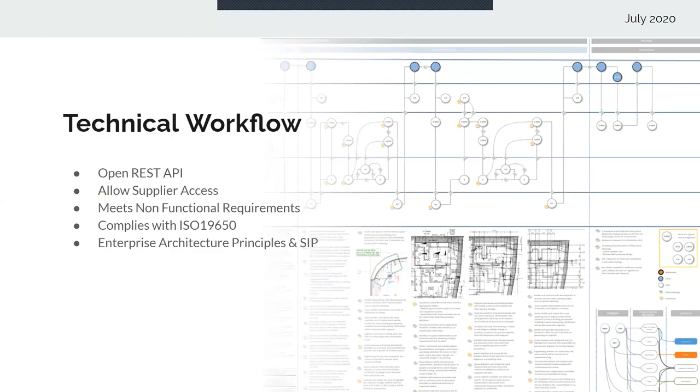The other one is, like I said, consulting work that we do, and this one was for the company YTL. Basically it was a dual track electric train system from Johor all the way to Gemas. The track itself, as you see, is almost 200 kilometers with 11 stations. So that's our involvement in that project.

What we've done specifically is help generate some digital assets. So they manage a lot of the production of the culverts, and I'm sure a lot of you have seen models dealt with in 3D, and there's always this perception that in the model it looks small. So this is one of the culverts, but in reality, that's how big some of the culvert sizes are. And I'm sure in Vietnam, being a tropical state, or in the tropical location, you get the monsoon seasons where there's a lot of rain, a lot of weather and so forth.

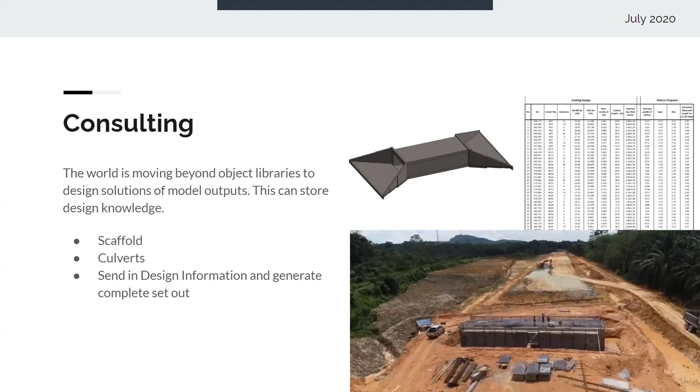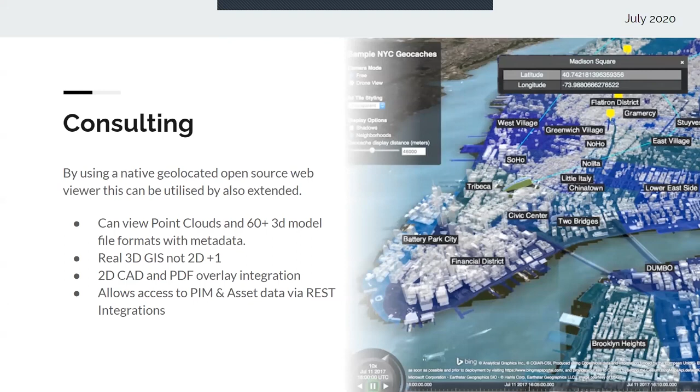So that's some of the work we've done. Further to this is, how do we explore data from a city's perspective? We've seen a lot of interest lately on how state and local authorities within Australia are going to better manage assets around the city. We've been able to work in these spaces, helping with GIS information, civil CAD information, as well as BIM deliverables. There's a variety of information that gets incumbent into a department, similar to how Vietnam's various departments would have to have someone that manages these assets. We've helped explore those types of solutions.

And then the other part is the tools that we develop around data compliance. The good thing about Vietnam and what the Ministry of Construction is doing now is you're setting these policies at the moment, or you may have already. You're asking for all these data requirements, but what I'd definitely recommend is, if the Ministry of Construction or your own organization is asking for digital information as a deliverable, think about what automation we can build into this. So if you're asking for classification, you can build audit tools that check a model and make sure these classifications have been entered into the necessary elements.

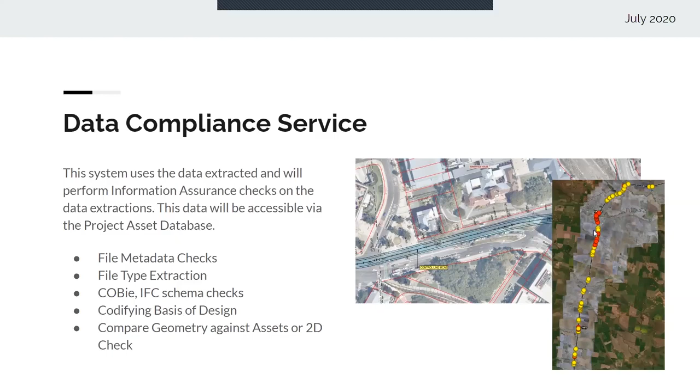So this one here, we developed a little design checking tool. In Australia, a lot of clients have a manual called the Basis of Design. It's kind of like a rule requirement—let's say for a road of 40 to 60 kilometers, you need a minimum radius curve of X or a certain distance. We can code those rules and check them against the models, and that's what this yellow and red indicates. Yellow means it's a warning, so be mindful. Red means it's an error, so you might want to redesign or investigate what's going on.

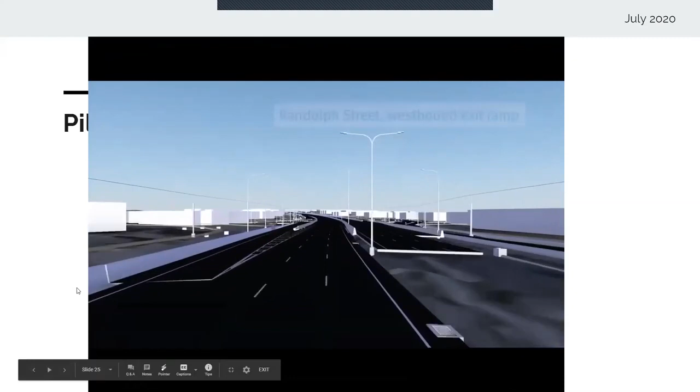So this is one of the case studies, project case studies here in Queensland. Department of Transport and Main Roads is effectively a department that manages all the roads, footpaths, and I guess all the accessible assets within Queensland. So if you remember looking at the map before, it's a pretty big land and zone.

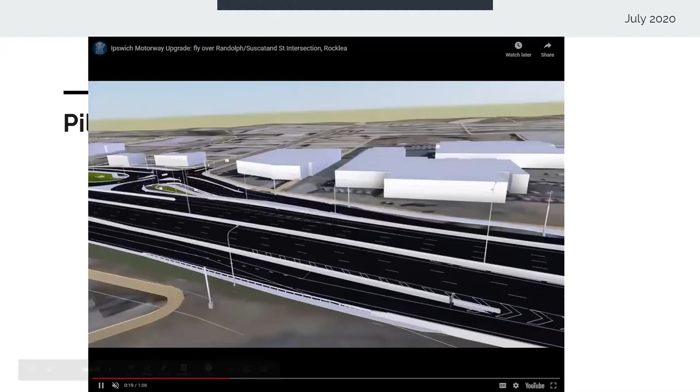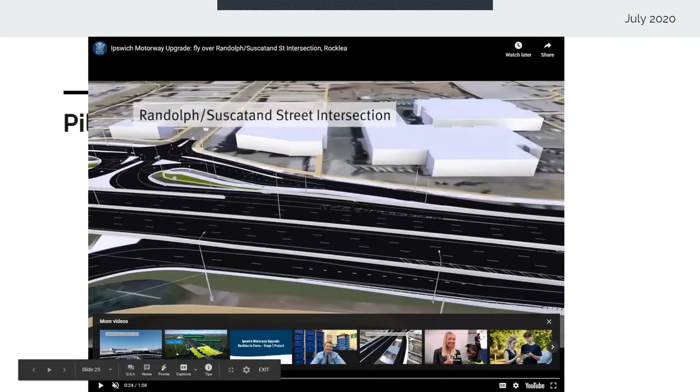So even though we can see it's a nice, pretty model, essentially this project itself, as we walk through and look through it in detail, there's obviously a lot of existing facilities. This was an existing highway, and obviously upgrading an existing road takes a lot of planning.

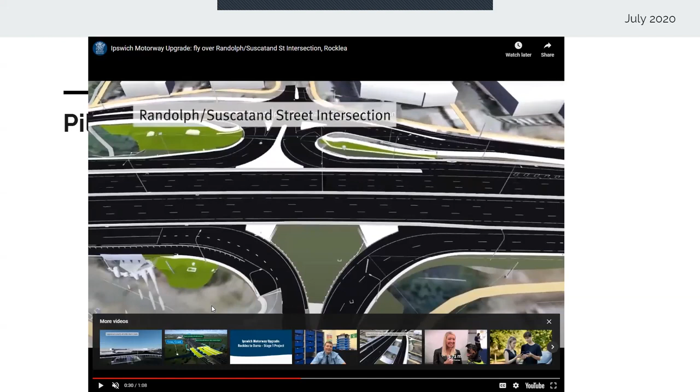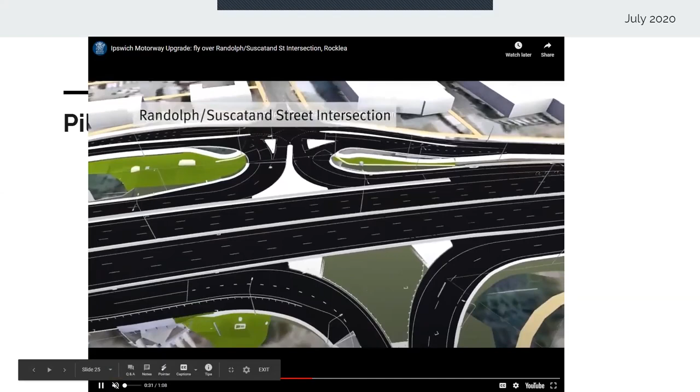One of the goals they achieved was having a model with enough attributes, not simple, but simple items like a barrier, a lighting pole, or the road. They're able to better plan how they're going to construct this, the staging, and sit down with other stakeholders to imagine how they'll communicate to businesses: we're going to be building this for the next 2-3 years, or even more, and it's going to have this type of impact to your business.

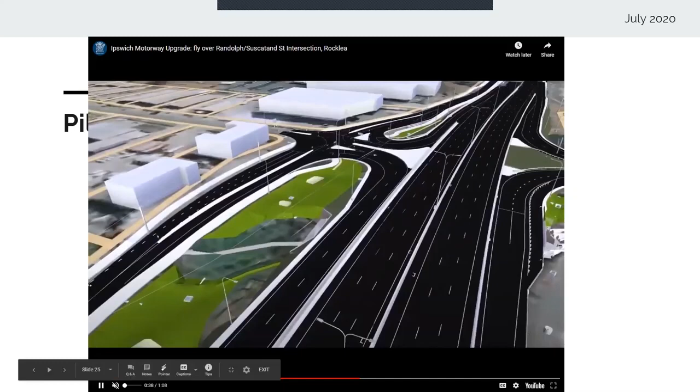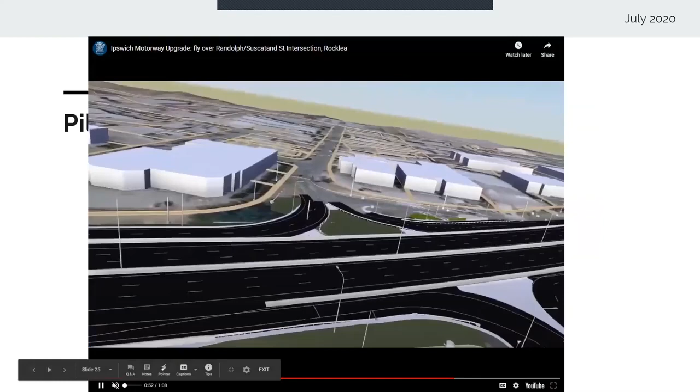Within Australia, in a lot of our projects there's a lot of community feedback. If it's a state project, there's local authority feedback, and if it's federal, there's state and local feedback. So there's always a collaborative approach to any capital works within Australia. This is where a lot of confusion and miscommunication happens on these projects, when you can't see the full picture or scale of the actual impact.

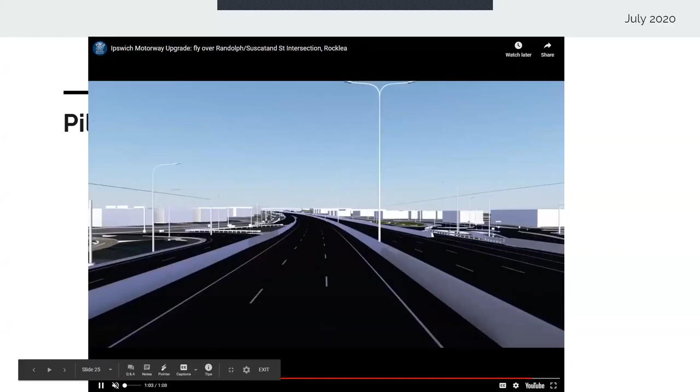As part of this approach to BIM, this was deemed a pilot project. That meant it was one of the first projects the department was looking at for enforcing BIM as a deliverable or a way of delivering the project, but also a way to assess how much we actually improved versus how much we wasted in terms of time and effort. That's what a pilot project is deemed between these departments.

So we saw the pretty picture of the renders, which is great, but ultimately it comes down to drilling into construction and sequencing.

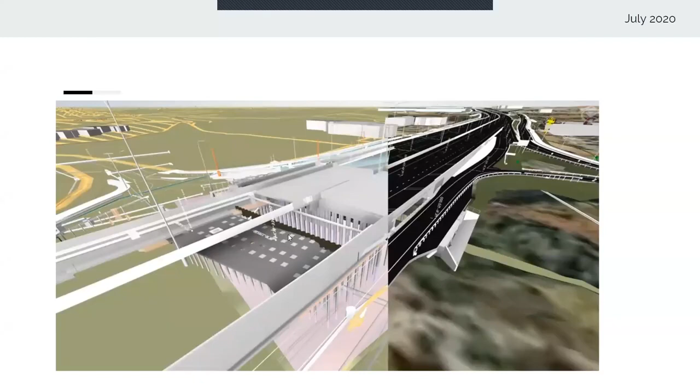In this case, it's very important that civil projects are managed effectively. If they're not, time is money, we all know that. And if there are miscalculations and missed estimates, or even just purely missed tasks, if we miss a critical task in the project, that adds time to the overall budget and so forth.

So having a digital representation of what's going to be built helps. You can imagine if I'm sitting here explaining to everyone how I'm going to build this, we can now have consultation and feedback on how that's going to work. So that's definitely one of the outcomes of that particular project.

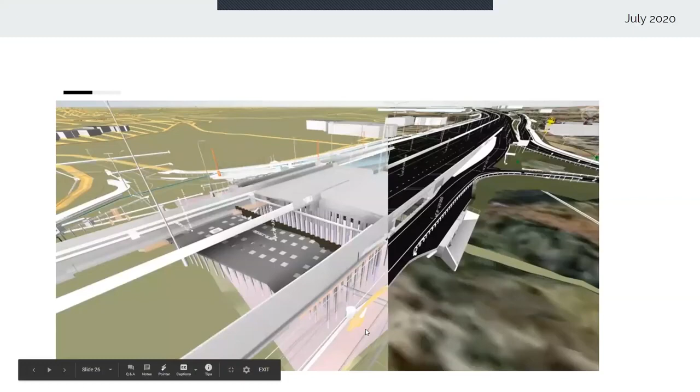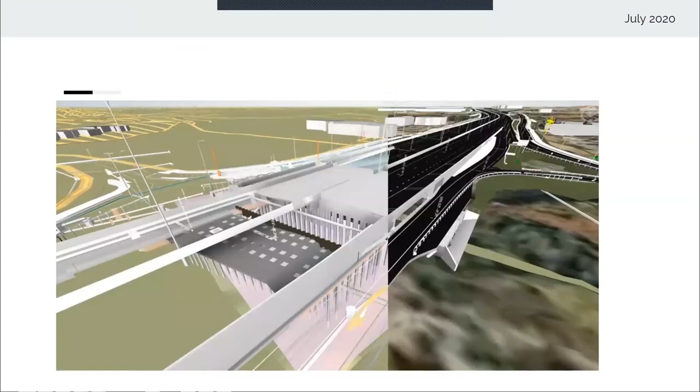Victoria has approached this from an asset management perspective. Ultimately, their goal in this approach was: we have a very large city with historical significance, with different assets from light rails, roads, trams, tunnels, you name it, like any other city would. So how do we better manage this information? That's where they talk about the term VDAS, which means the Victorian Digital Asset Strategy.

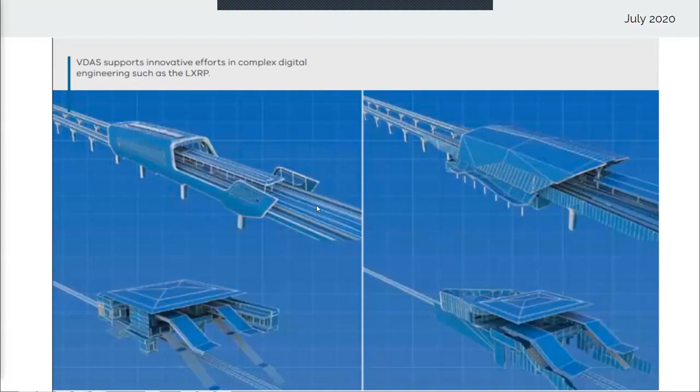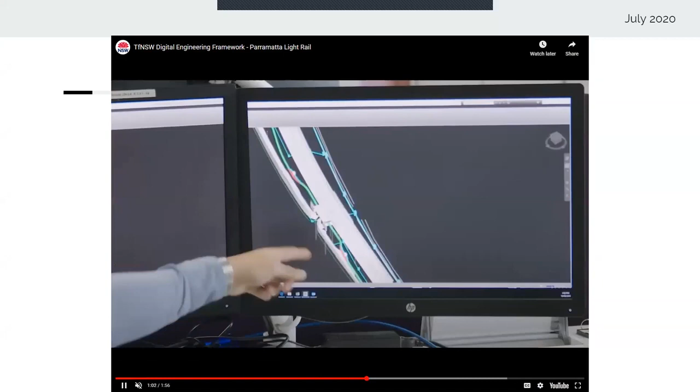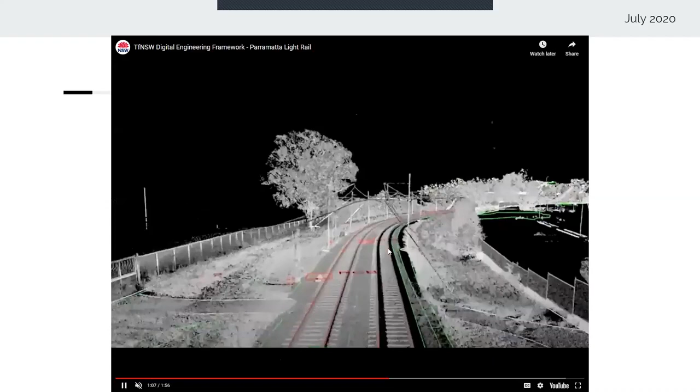So they can now say, hey contractor, here's all of our information where we know that these are where the pipes are located and so forth. So this helps reduce risk from a contractor perspective, because if he knows that there's a pipe there and he's 90% sure the pipe is there versus 50% sure, that doesn't help. So there's a few things here: point cloud capturing, LiDAR, and so forth. But ultimately, they, or the contractor, or when it gets into construction, want to know where this is located.

So basically, I guess to sum up this situation here, what they've done is not produce a BIM model or anything. They've just looked internally within their business or organization to consider, well, how do we better manage the assets that we already have in ground? It's not always about the new construction, the new build. It's what we have now and how do we capture that information, which is a lot of cost.

So, we're almost to a conclusion.

With New South Wales, their approach is vastly broader. They look at skills in the industry, ways of working differently, the technology, how this is going to affect procurement, costing of the project, and ultimately their vision of a digital twin, which is some type of digital representation of their asset. It doesn't have to be a model, it can be databases or data that shows the location.

Now this is where I wanted to talk to you guys about classifications. Similar to Queensland, they've followed a Uniclass format. I think it's probably good that you understand what the classification system is.

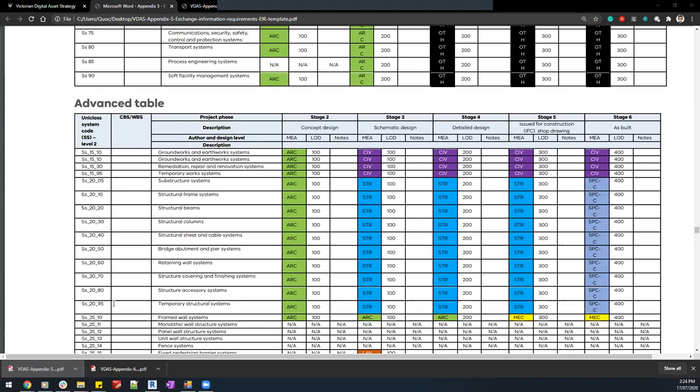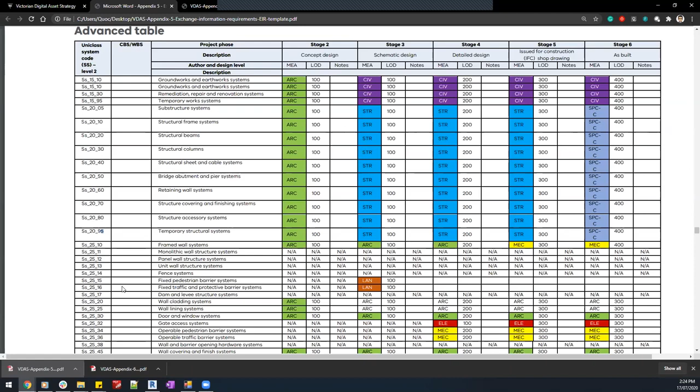Also, we can see that with the LOD table using Uniclass system code, it looks a little bit unfamiliar for us, I think, because we've been seeing a lot of the Uniformat table, with like foundation and then substructure. Yeah, and ultimately it just comes down to a preference really, and what system best works with you.

I personally think, and this is just my perspective, that a classification is a good start, whichever you use. But I think looking at the author, establishing a good relationship with them so that in an event where you need to make some changes that work for you or your department, you want to know they are able to help you there, and not just say 'well, no, this is how we do it and that's it,' because that locks you into their way of doing things and not your own.

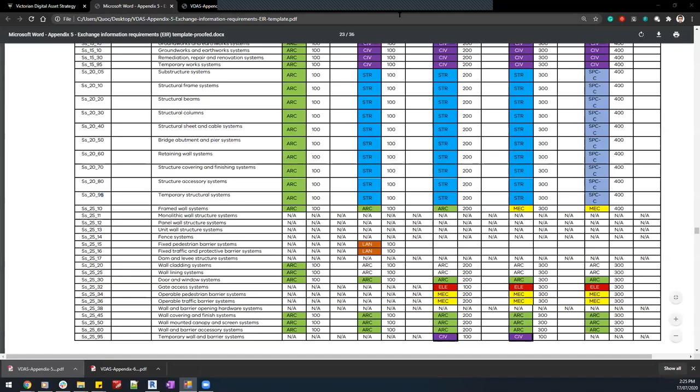I'm gonna see if we have a question on Slido. Yeah sure. So we have one question - can you, I'm gonna share my screen a little bit. So here you can see that we have a few questions.

So Cuong, about the template for EIR and other templates, we can have that on the website. So I'm gonna recap that real quick. Sure.